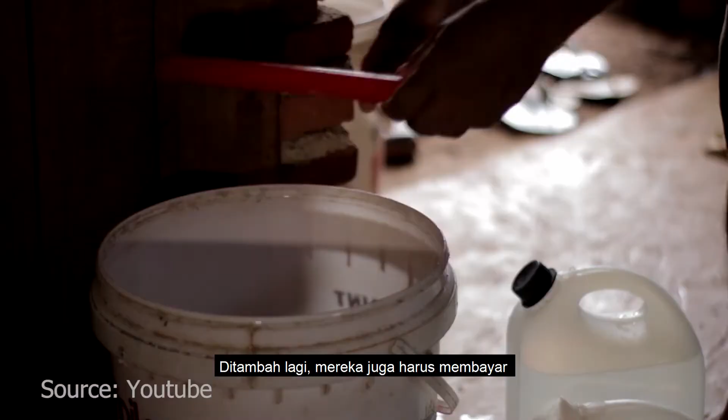This is evidenced by the fact that many coastal areas in Indonesia are far from access to clean water and have not been able to treat seawater. One of them is the island of Kangean in Sumenep, Madura. The water there is still murky or salty, which is caused because groundwater is affected by seawater intrusion where there is excessive groundwater extraction and sea level rise, so that people of Kangean are forced to take water from the opposite island with an estimated time of 1 hour, plus they also have to pay at a price that is 70 times more expensive than the usual price.

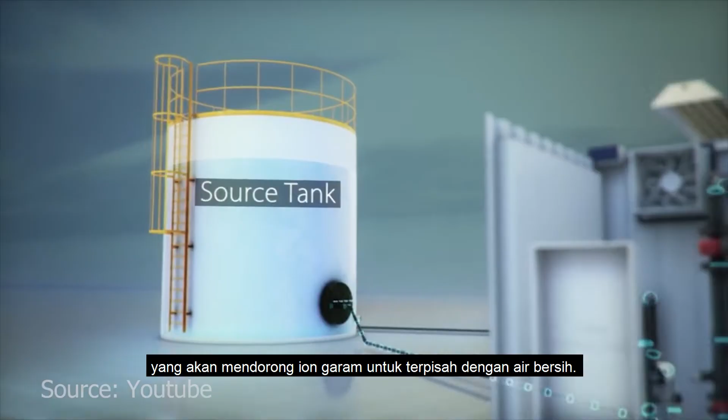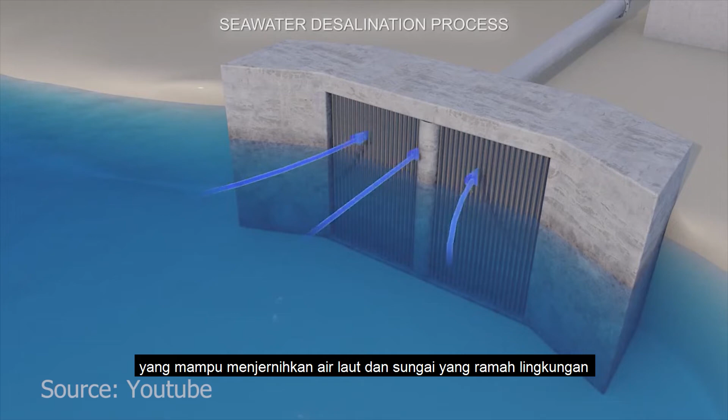Electrodialysis is a method of desalinating water by generating shockwaves in seawater that will encourage salt ions to separate from clean water. In addition, electrocoagulation is an alternative water purification method that is proven to be effective in reducing metal ions and particles in water, and reducing water salinity levels by running a direct electric current. However, until now there has been no multifunctional desalination device capable of purifying sea and river water that is environmentally friendly on a household scale.

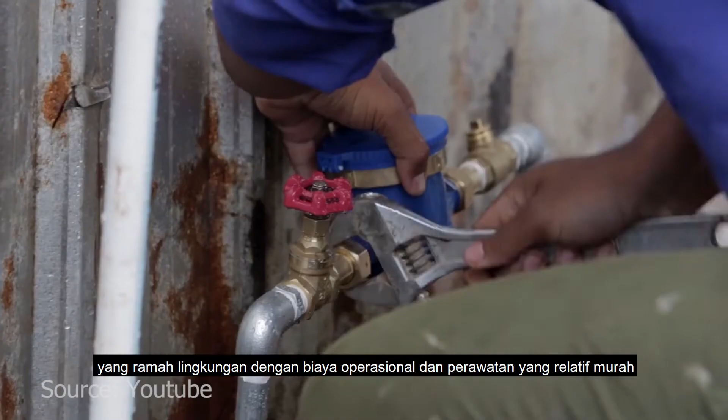The previous technology, namely thermal desalination technology, requires large energy, high cost, and complex equipment structure. Thus, electrodialysis and electrocoagulation can be an alternative seawater desalination method that is environmentally friendly with relatively low operational and maintenance costs and has high contaminant removal efficiency.

Therefore, we are the delegates of UM Laboratory Senior High School, Malang City. I'm Raditya Syarifaturiat and my partner Raffi Raditya Sekolah present NEWATER, solar desalination technology to support marine tourism and sustainable infrastructure on Kangean Island, Sumenep, Madura.

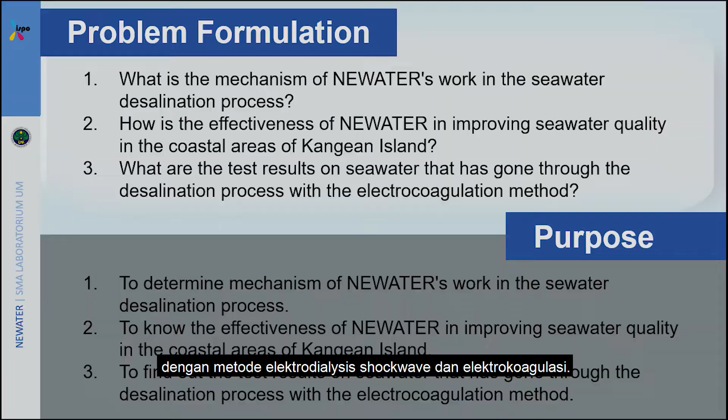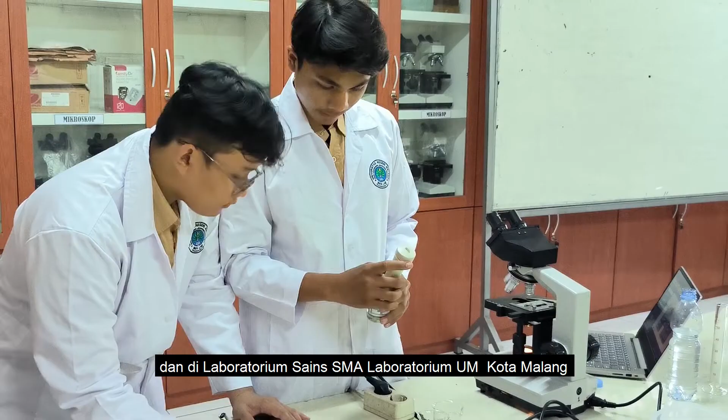The purpose of this study is to determine the mechanism of action, effectiveness, and the test result of NEWATER in improving the quality of seawater in the coastal area of Kangean Island using shockwave electrodialysis and electrocoagulation methods. This activity took place for 3 months, located on Kangean Island, Sumenep, Madura, in the Lab Campus Research Center, Ecology Laboratory, Brawijaya University, and at the UM Laboratory Senior High School Science Laboratory, Malang City.

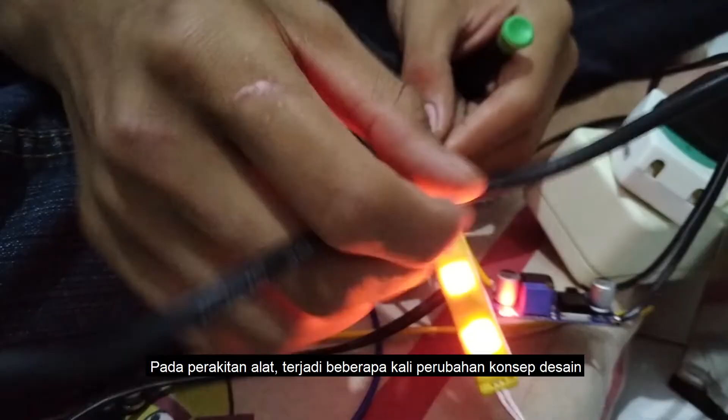First, the design of New Water was carried out using SketchUp software, then continued with the selection of materials to be used. One of them is 304 stainless steel as the main frame of the tool because it is not easily corrosive and is suitable for use with water. In the tool assembly, there were several changes in the design concept to produce the New Water tool assembly that is currently in use. New Water was then tested with samples of murky and brackish well water in Kangen.

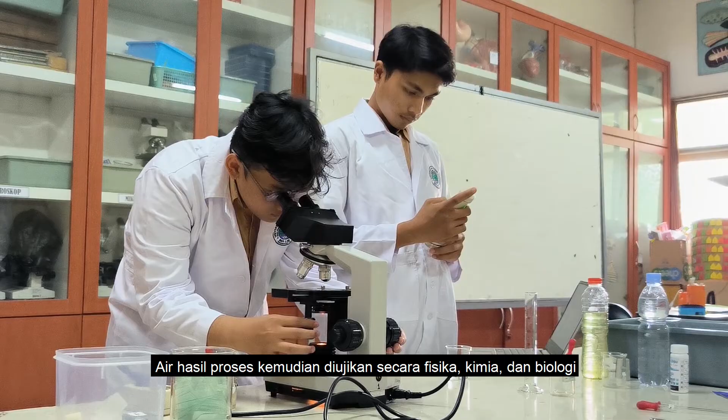The variation used was the length of time of the electrocoagulation process, namely 30, 60, 90, and 120 minutes. The processed water was then tested physically, chemically, and biologically to determine the effectiveness of New Water in desalinating and purifying water.

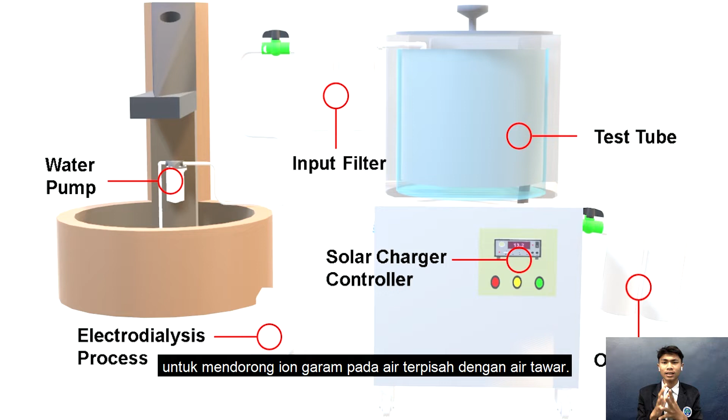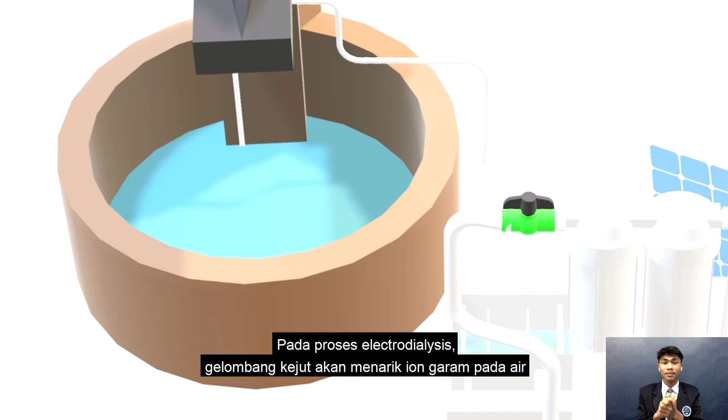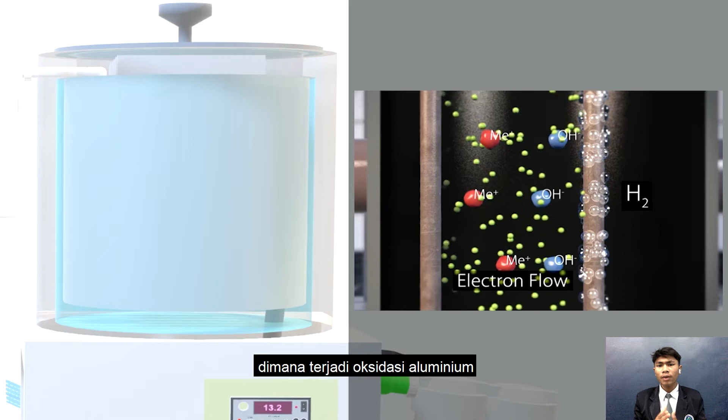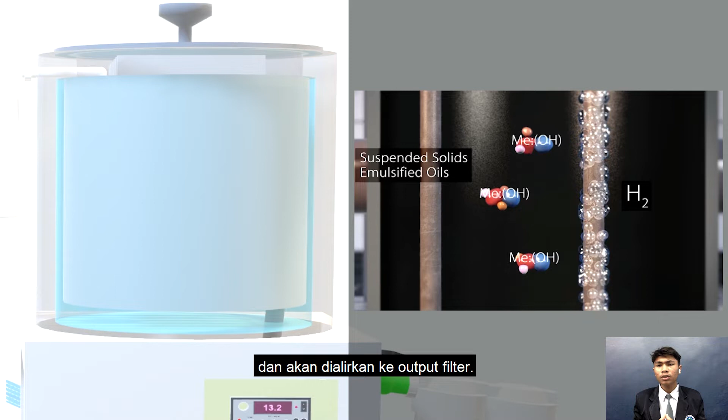The water is then flowed from the input filter to the test tube to filter out large particles in the water. In the test tube, the electrocoagulation process occurs where aluminum oxidation occurs, which will form aluminum hydroxide flocs to bind all pollutants in the water. The floating flocs will leave pollutant-free water at the bottom, which will flow to the output filter. The fresh and clear processed water is ready for use.

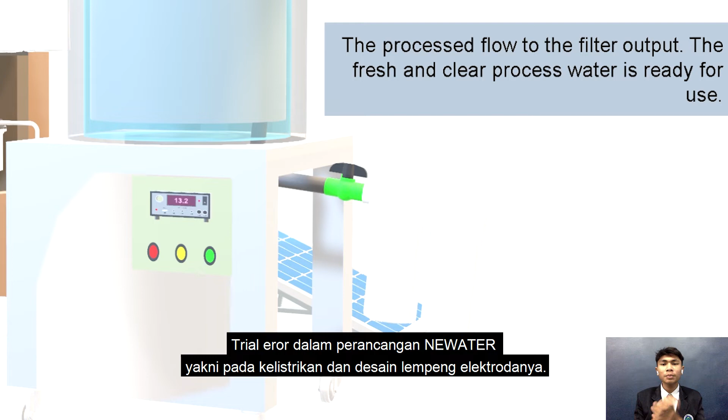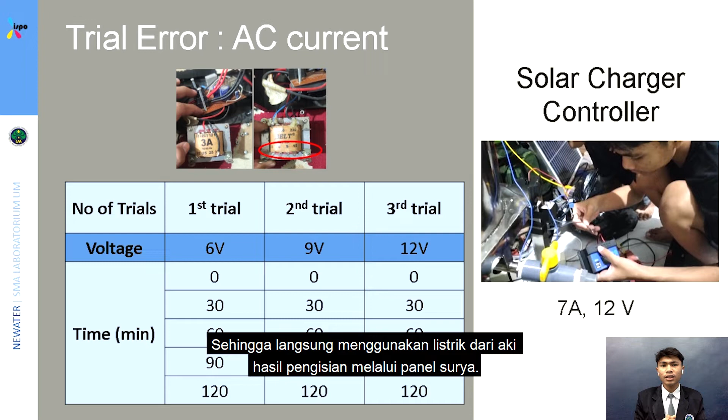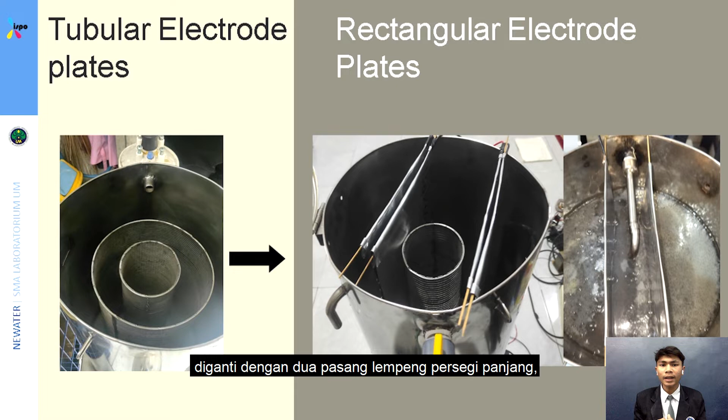Trial and error in the design of the electricity and electrode plates. The use of AC electric current, which requires a transformer to convert to DC current, turned out to have a large load. The 3 ampere and 10 ampere transformers were tried but still could not accommodate the load. So it directly uses electricity from a battery charged through a solar panel. In addition, the original design of tubular electrode plates was replaced with 2 pairs of rectangular plates, thus improving the electrocoagulation process.

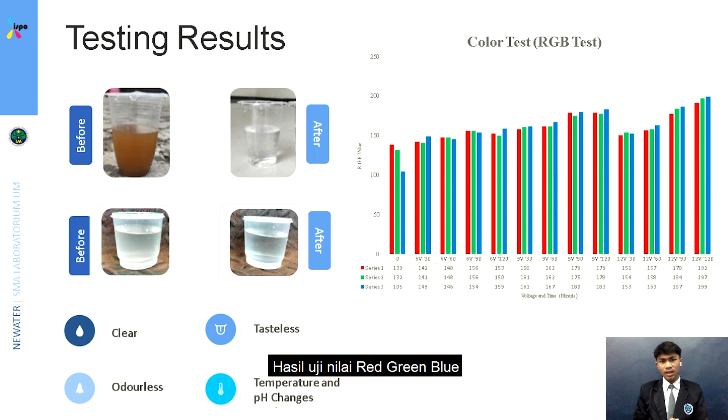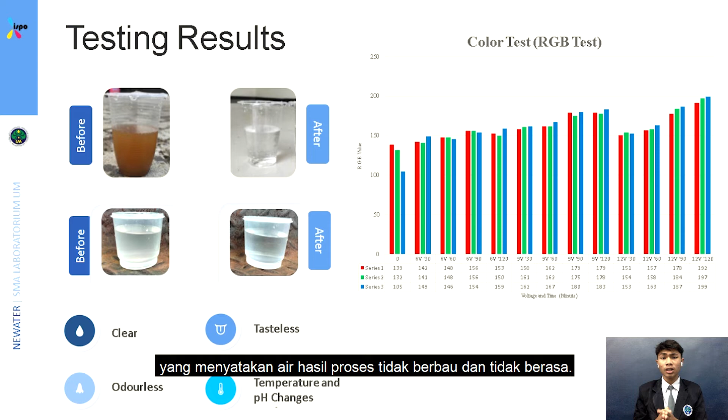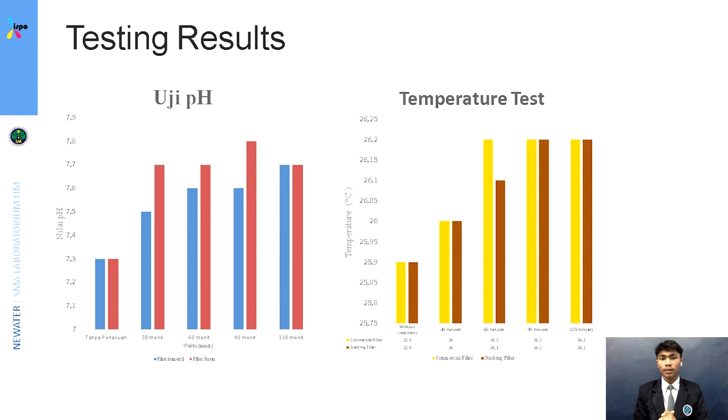New Water is effective in the color and odor tests. The red, green, blue value test results show that the greater the voltage and the longer the time, the clearer the water quality. Likewise, the taste and odor test results showed the processed water was odorless and tasteless. From the filter variants, a commercial filter and a stacking filter resulted in a significant increase in pH value and temperature. So, the stacking filter was chosen because it was more economical.

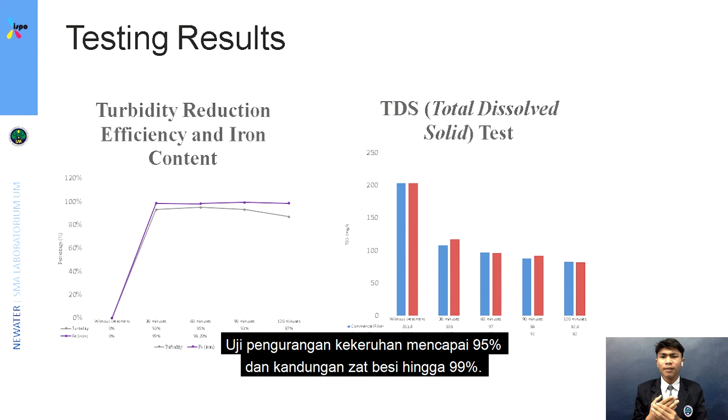The test result obtained a decreased value up to 59%. So, the TDS value meets the requirement of the clean water quality standard. The turbidity reduction is 95% and iron content up to 99%. In addition, there was also a 99% reduction in E. coli bacteria, and a 90% reduction in salinity.

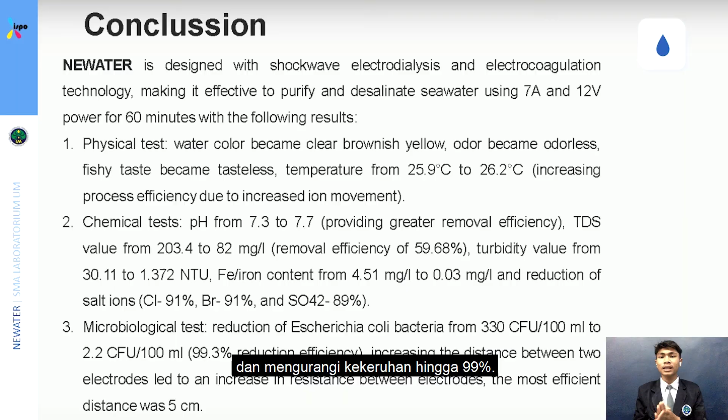New Water: a water purification and seawater desalination device designed with a two-step purification mechanism. Use of shockwave electrodialysis and electrocoagulation is proven to be able to reduce water salinity level by 90% and reduce turbidity by 99%. New Water for excellent water quality.